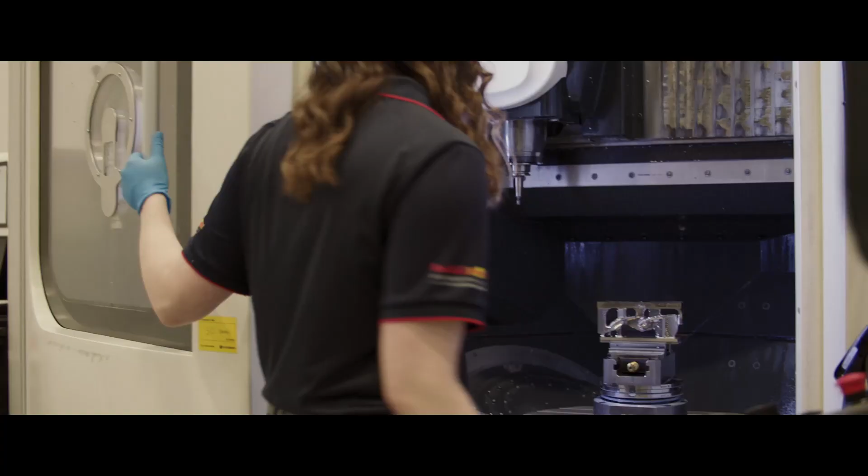How do you build a champion? In this era of Formula One, it takes a balance of skill and science, adrenaline and engineering, a passion for disruption from the design lab to the pit lane, and the drive to not only be faster, but more innovative than the competition. Today we find ourselves an hour's drive north of London at the home of one motorsport team whose mission is to win and to do it differently. Join me as we kick off this journey with a peek behind the curtain at one of F1's hottest and most competitive teams, to explore how engineering simulation is helping to unlock a competitive edge and push the boundaries of what's possible both on and off track. I'm Miss Emma Walsh, and this is Driven by Simulation.

Formula One is very much pushing the boundaries, whether it's on track or off track in the software and how we utilize it. At the moment it's all about development during the course of the season. With a cost cap, you've got to be efficient and effective about where you choose to do your development. The team are in that cycle at the moment, and very shortly they'll be starting to think about next year's car as well.

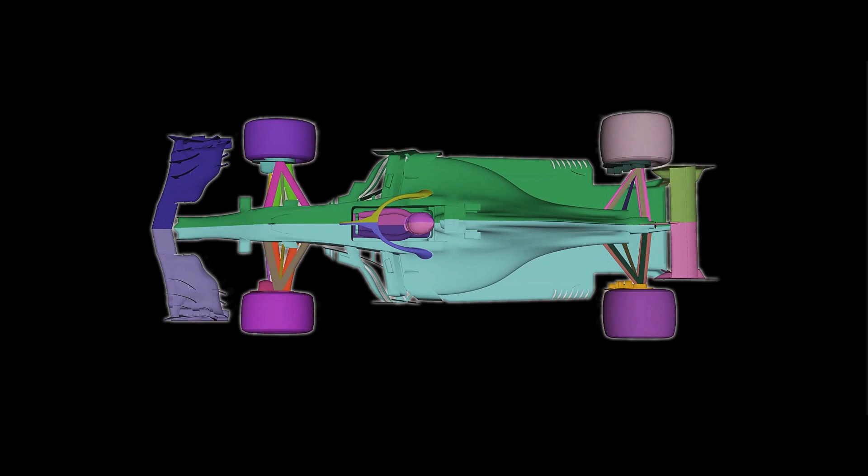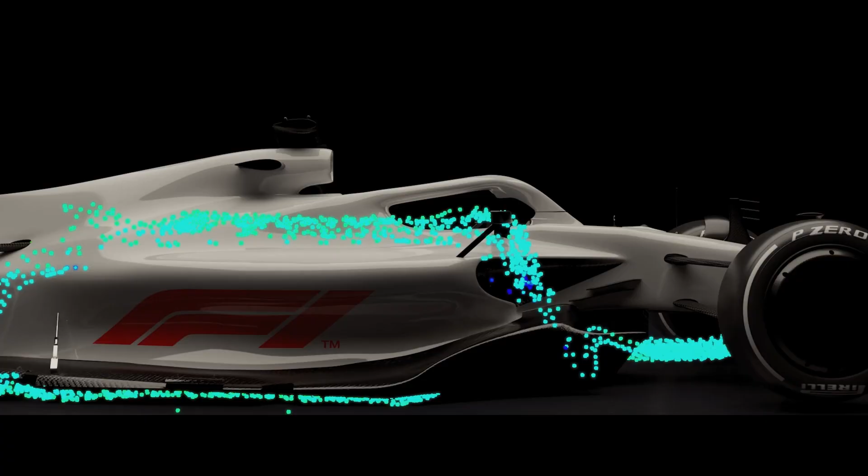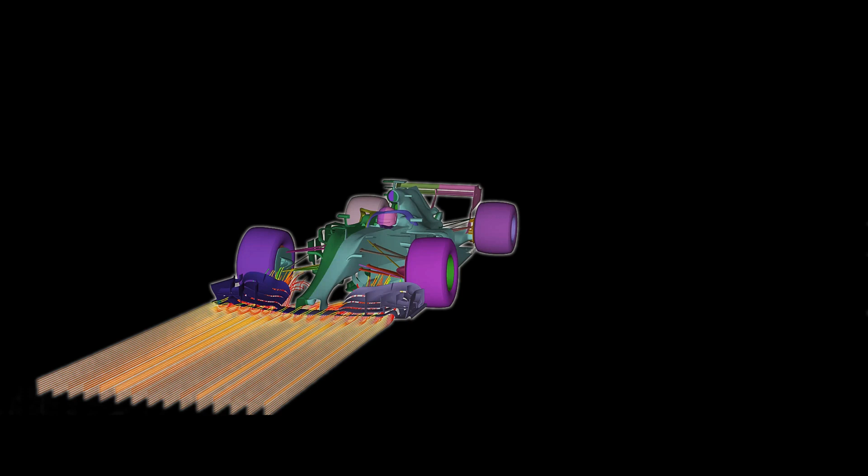Computational fluid dynamics, or CFD, helps engineers understand the forces that affect fluid flow and solve challenges related to heat transfer. Using models and advanced algorithms, CFD predicts the true-to-life physics on numerous prototype variations virtually, which helps determine the optimal design in far less time with less cost. It all starts with a CAD model, but a CAD model on an F1 car is a very complicated design. So we must take the design through a process called meshing, whereby the CAD model is divided into smaller cells, which together form a mesh. This allows for simulation of fluid flow on smaller segments or components of the car incrementally, rather than the entire thing in every iteration. That unlocks rapid design exploration, where we can quickly test and tweak a multitude of variations on the design.

The goal is to find a stable and accurate solution virtually before any metal is cut. Now you can imagine this process generates a lot of data, and going back to the starting point with every design alteration is out of the question when you want to make a better, faster decision. So the data needs to be accessible and up to date, especially as multiple engineering teams are focused on different aspects of the same car.

In this era of Formula One, reliability is absolutely key.

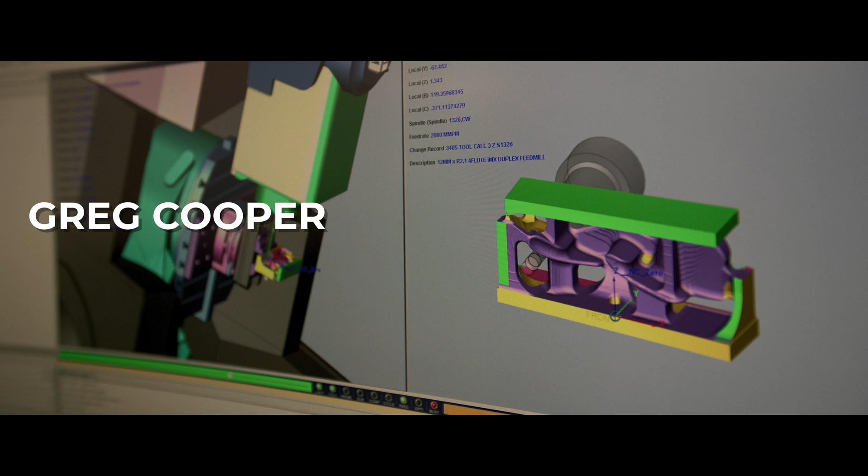In an ever-expanding company, we need to make sure all employees are using a single source of truth for material databases and material process information. We make sure that they are used throughout the business, by the designers doing the simulation work, all the way through to manufacturing that are building the parts. Even at the racetrack, when we are doing repairs, we still need to be using the same material information and making sure the processes are as the designer has designed.

So using ANSYS Granta MI, we can overcome all these obstacles. We make sure all the data is in the right place and is accessible by the right people at the right times. It's really getting quite difficult for me to imagine how race cars were ever built without using simulation.

Okay, so if you weren't to use simulation, what would your work look like? Wow, if you imagine going back a few years in the Formula One world, our first season was 2005, and at that point everybody's understanding of ground-based aerodynamics was just a little bit different to what it is now. The sport was much more oriented towards physical testing, so Formula One's calendar had almost as many test events as it had race events.

Part of the journey that Formula One has been going on, to try and make itself a little bit more sustainable, a little bit more cost sensible, and also to embrace new technologies that are coming to the fore, like advanced CFD, is that they reduce the amount of physical testing that we get with our cars. So now, much more of that focus is on the digital world.

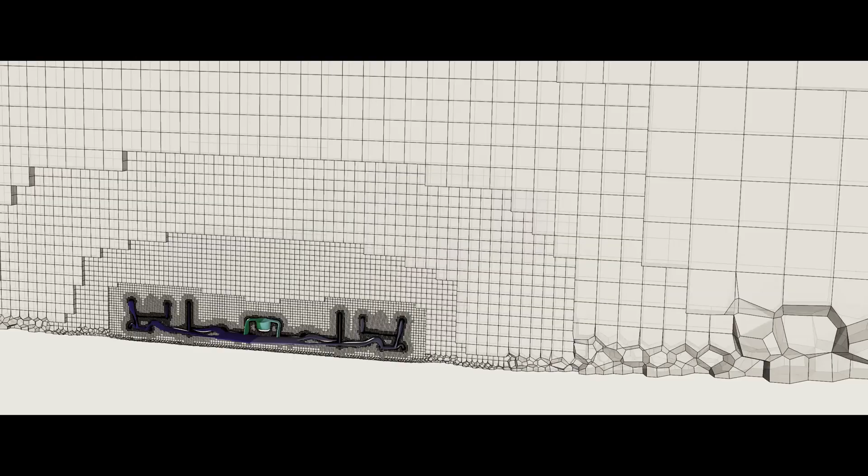And the lovely thing about simulation is that you can put this car in a virtual wind tunnel. You can look at how the air will move around those shapes without having to physically build anything, which is absolutely the benefit of what ANSYS brings to the table. Once we've done the number crunching side, you need to post-process it and put it out into something we can really see, visualize and understand. And that's where you get those iconic, brightly colored flow diagrams where you see all the air moving around the car.

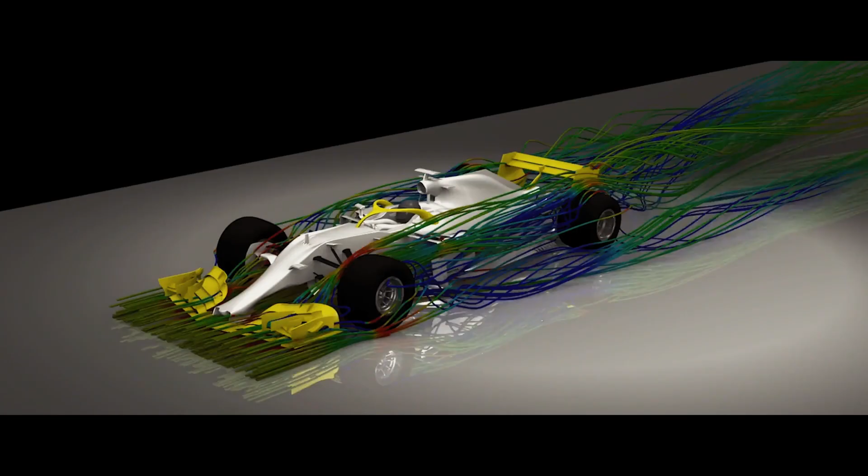The brilliant thing is that you can do dozens of those before you have to commit to a design. In the old days, we would have had to prototype physically, and that's expensive, it takes time, and you don't get the results for months in advance. It takes a long time to actually get the results back.

Now we could prototype in the virtual world, go to the virtual wind tunnel, and get real valuable data that we can then correlate with what happens on track really quickly. It means that we're able to make decisions more rapidly, and go through more iterative design simulations before we commit to what we think is the best one.

And when we then get to the track, we have higher confidence that the car we put on track will replicate the car we saw in the virtual wind tunnel. And that's what it's all about, making sure that your simulation car and your real car are as closely aligned in terms of data as possible. And that's hopefully where ANSYS can give us that competitive edge. Competitive edge? Yeah, I think you've got that one covered.